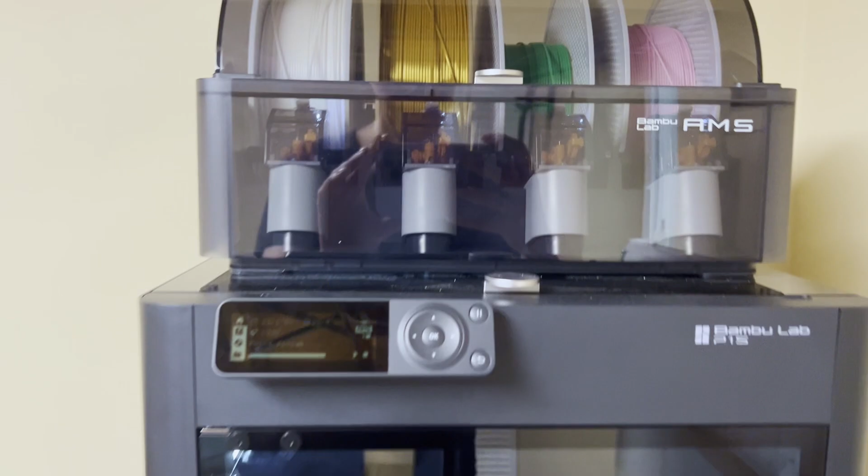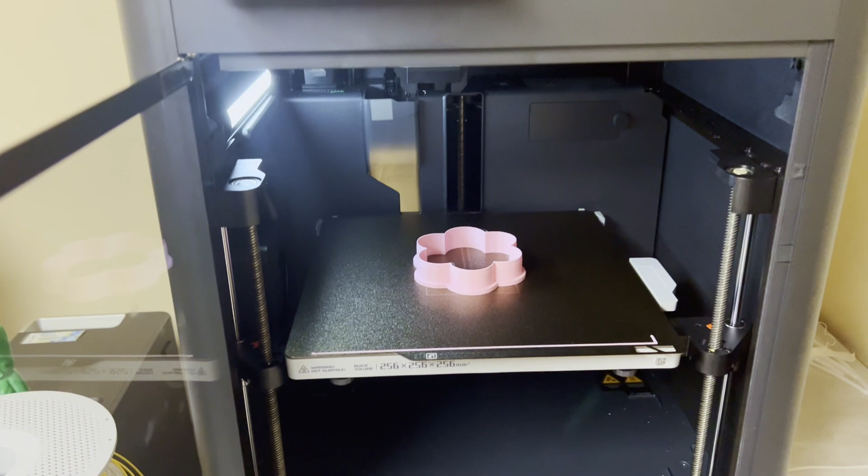I will quickly stop and say what printer I have. My printer is a Bambu Lab P1S. I haven't had a chance to compare it with others. I'm just getting to know it, and it's a completely new device for me. At that moment, I only learned how to make cookie cutters on the printer, and I want to share this with you. Here is food safe PLA filament that I use for cookie cutters, also from Bambu Lab.

I click on Edit, then select Shadows and add Outline. After that, adjust the size of the outline. Make all corners rounded as much as possible. Once I have the image, I download it as a JPG file.

Then I go to the website called cookiecad.com, upload my image, and the site turns it into an STL file.

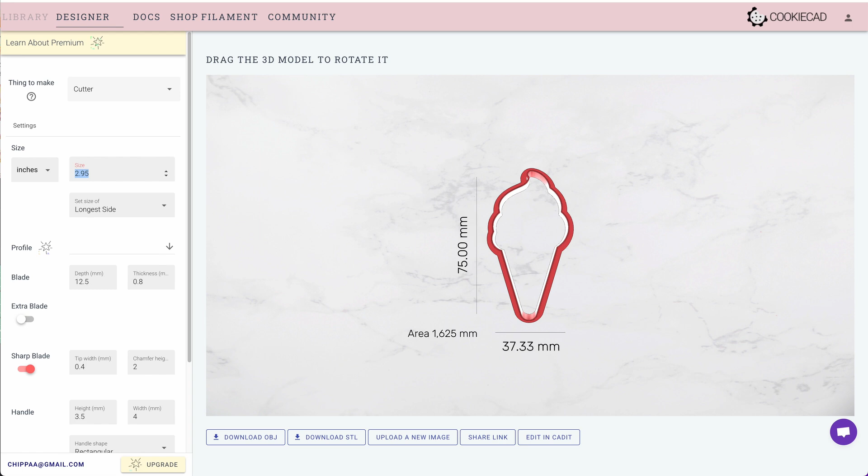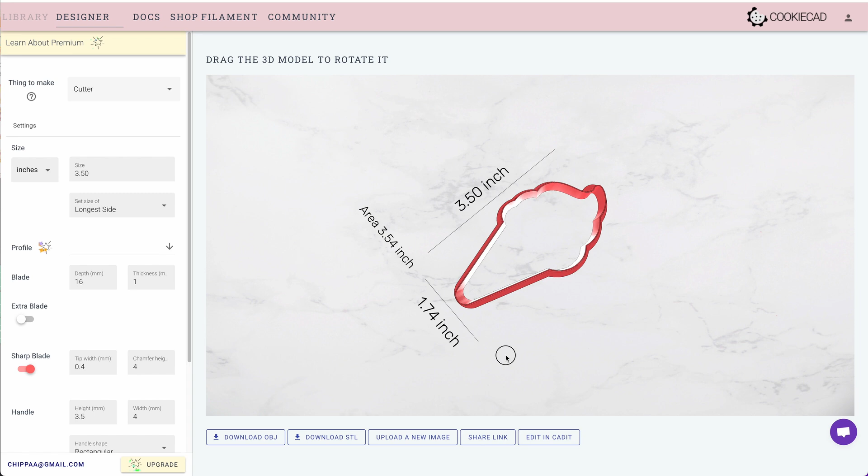Here are the settings that I use for cookie cutters. To make the cutter, I select inches for size. This cutter I will make 3.5 inches. For blade I use depth 16 and thickness 1. Sharp blade 0.4 by 4. Handle settings I don't change. This is how my ice cream cookie cutter will look like. Everything looks great, so I download it.

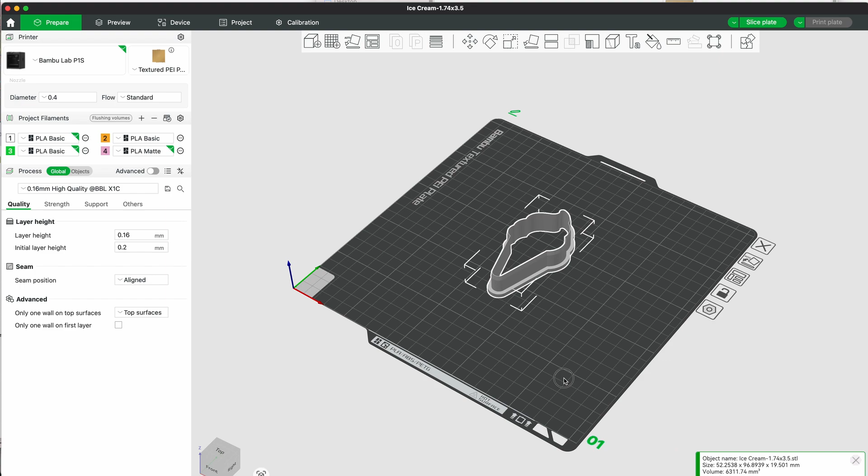Now time to open Bambu Studio app and upload our STL file. Here is my ice cream cookie cutter, and on the left side you can see my settings. Then I click Preview, and here you can see the slicing result.

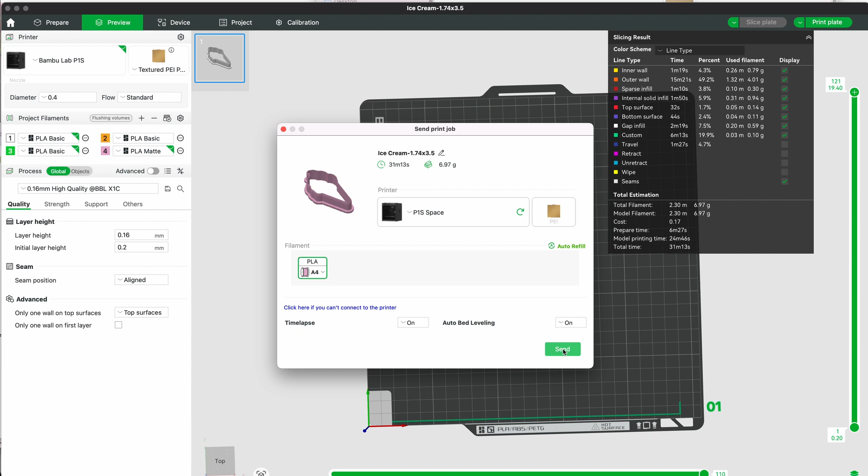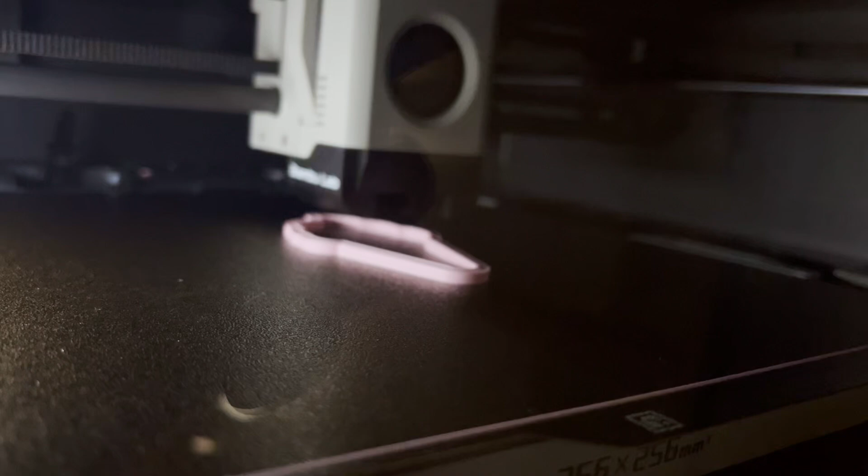Now time to print. Here I select the color and send to print. This cutter will be printed in 30 minutes, so let's check it out. Here you can see the real printing speed. After 30 minutes, my cutter is ready.

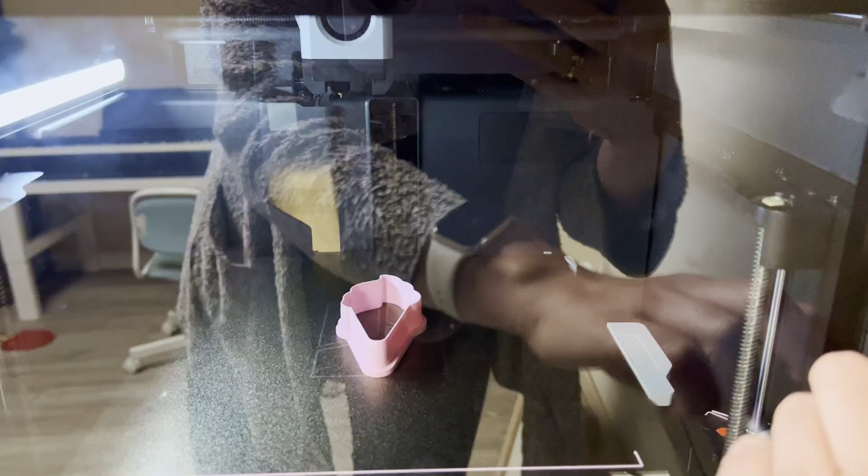And here is the final result, one more design for my cookie cutter collection. Here are a few more cookie cutters I've printed before. And look at these cookies my friend made using them. How cute they are.